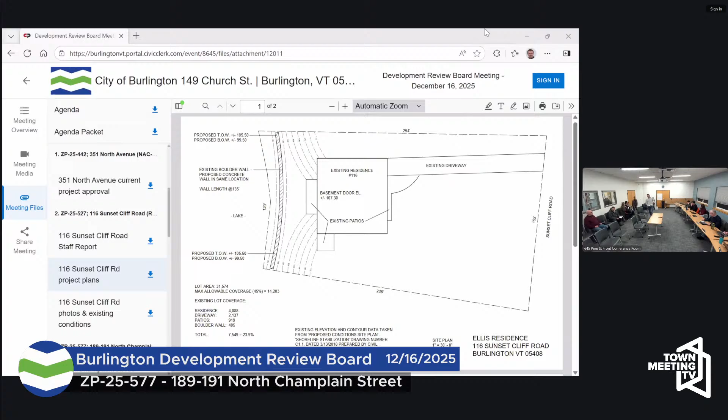We will move on to the next item then, which is ZP-25-577 - 189-191 North Champlain. So quick. Hello.

Thank you, if you want to give us a bit of an overview of the project, the materials submitted were... oh yeah, sorry. And then is there anyone that wants to speak on this item, or anyone else in the room? Just swearing everyone at once. Okay, anyone who wants to speak on this item, if you would raise your right hand and swear that the testimony you give tonight is true and correct under pains and penalty of perjury. Yes.

Hello, Michael Alvanos from Tram, the owner of the property. This property is up for essentially a pretty substantial rehabilitation. I don't know exactly when, but there was a fire on this property, maybe March 2024. It caused significant damage to the upper portion of the building, specifically towards the front, top, and other portions. But the real issue is the fire department brought their equipment in, sprayed water everywhere, and the project was left vacant for a pretty healthy amount of time, and the interior ended up becoming extremely deteriorated throughout the process.

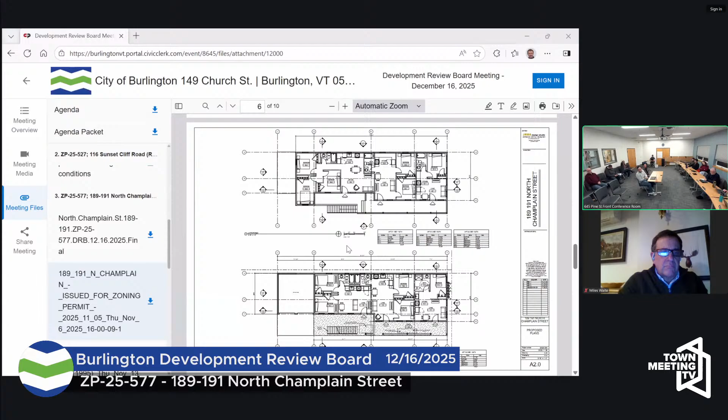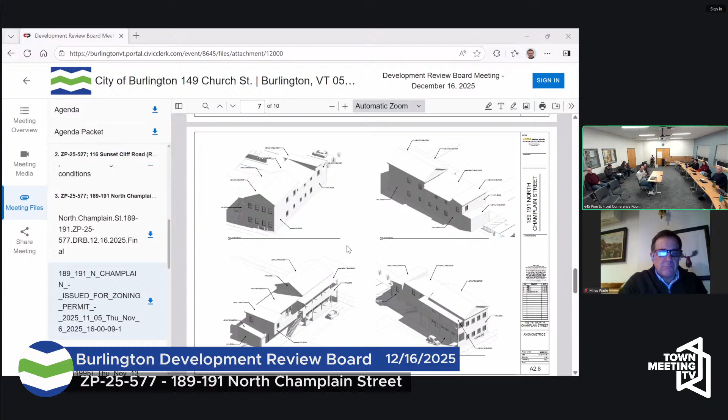These are just some axons showing you - there was a photo page too. Essentially, the exterior of the building is going to get re-sheathed. We're showing wood siding on the building, but there is an option to do a concrete board siding instead. I think we're going to weigh out the costs involved on both of those, to see which one is cost effective for the owner. But new windows, new doors.

The back rear of the property currently has some open garage doors here. I think we're planning on putting some garage doors in. Again, just trying to bring the building back to where it was, hopefully, before it started to go through a substantial amount of neglect.

The staff notes had some information in there, and I got it to Mary later than I wish I did, but there are some architectural details we plan on holding on to throughout the building. There's some corbels and some ornamentation on the front portion of the building that we're planning on keeping. There's some rafter tails at the rear portion of the building that we plan on making sure stay.

What else do we have, Mary? But our intention is, we're not going to - I don't think there's any intention to remove or deteriorate the building's historic qualities anymore. It has been neglected, but we're trying to reinforce those as best we can. I think we're just here to give you guys an idea of what's going on, and hopefully it's a pretty simple process. We'll see.

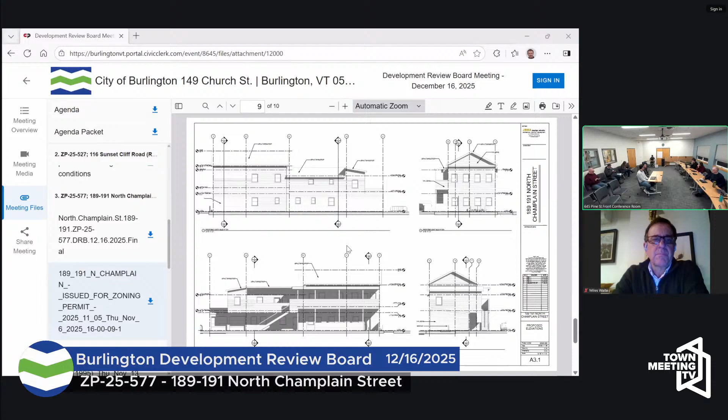Any other questions from the board? I know you all want to speak on this item as well. Yeah, that'd be great. It would be helpful if you can go there for audio purposes and just state your name and where you live.

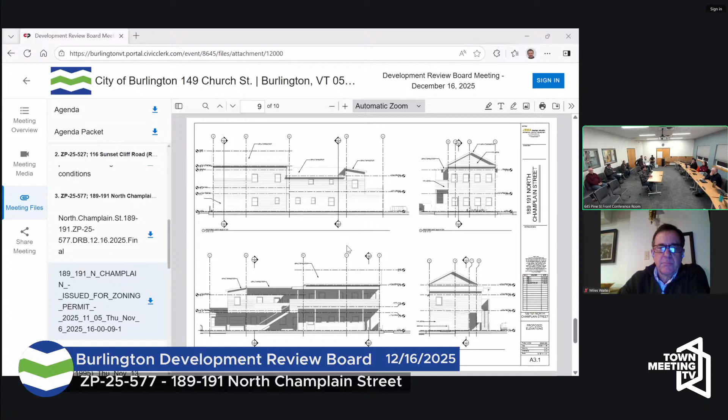Jonathan Rowe, I live at 193 North Champlain with my partner Nora, so we're to the north. Reading the packet yesterday, it was said that the house is on the property line in one portion, and then it said close to the property line. If you look down our driveway, the house is on two different planes - the more easterly part of it juts out a little more.

Whose responsibility is it for determining if it's on the property line, if it's close, or if any part of it is over? If the building is on the property line and the soffit hangs over with no gutter over the plane of our property line, are we responsible for what comes off the roof? Is there any kind of ordinance for putting gutters on? Is this the right place to even ask these questions? Understandable question. I think the basics are that we don't deal with any property line disputes.

The best that we have is the site plans in front of us and how they're marked. So I guess where it says it's on the line, and then it's close to, so it's worded differently. My question would be, say it is on the property line, the plane of the siding, roof overhang X amount, right?

We're more worried about parking under it, and we're at the point now where we can't even open our car doors because of the snow off the roof, because it's so tight. Just in general, obviously we bought the house, we knew what we were getting into. Definitely weren't aware that it was going to be renovated after being vacant for 2 years.

Sorry, late breaking hand raising on that one. So we're reopening the public hearing. Sharon, we're here to hear you on this item. Sorry, I raised my hand late because I didn't think this was going to come up.

I heard the applicant make a statement regarding the affordable unit, and I'm certainly hoping that I understand his position, or the architect's position, but I really feel that we need affordable units, and this meets the criteria. It is more than 5 units, and I feel that 1 unit that is affordable is something that we should support, and I certainly hope that he will understand the value and the need for this in our housing market. So I just wanted to speak before the DRB in support of maintaining what the ordinance allows and have the creation of 1 affordable unit in this reconstruction.

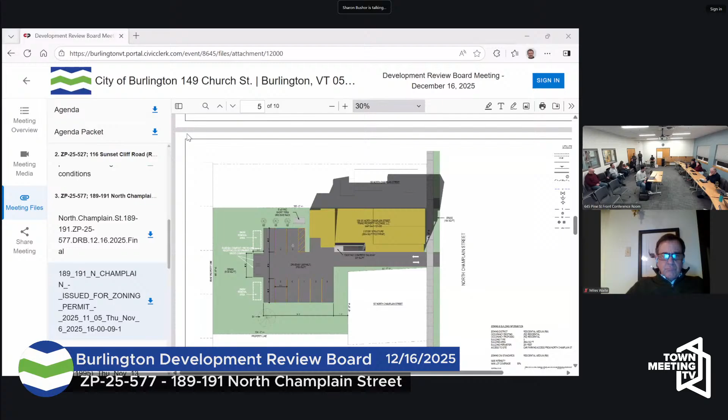Thank you. Thank you, Sharon. Anything you want to do? Okay, thank you very much. With that, we'll close the public hearing. Thank you.

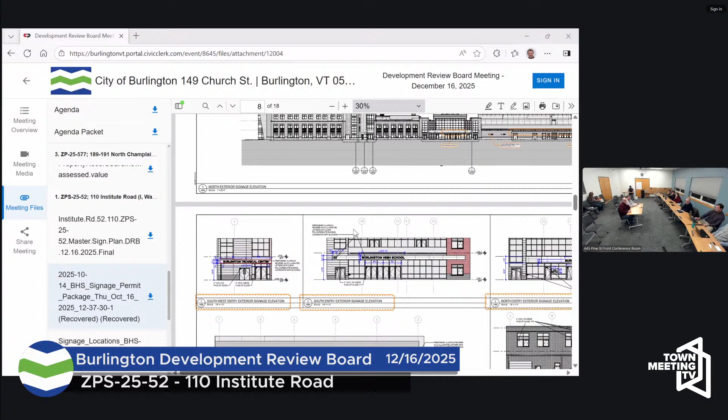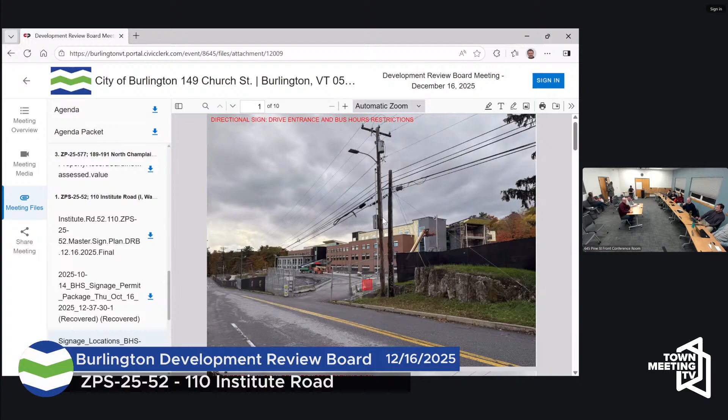Are we able to go down, or actually can we, there's a sign locations PDF there. I think that might be the one that's a little bit more useful to look at for this. Oh, I apologize, there's another file that actually shows the directional signs. This does show the locations for them, but there's another one, yes, that proposed site signs plan.

So within the site, because we're bringing people to multiple locations, depending on which access they're looking for, there are directional signs that we have designed that essentially assemble a set of directional signs into one location. So at the entry to the pull-off drive along Institute Road is the largest one, with arrows that can direct you to whether you're going to the Burlington High School, whether you're going to the Burlington Tech Center, whether you're headed around to the BHS Community Gym.

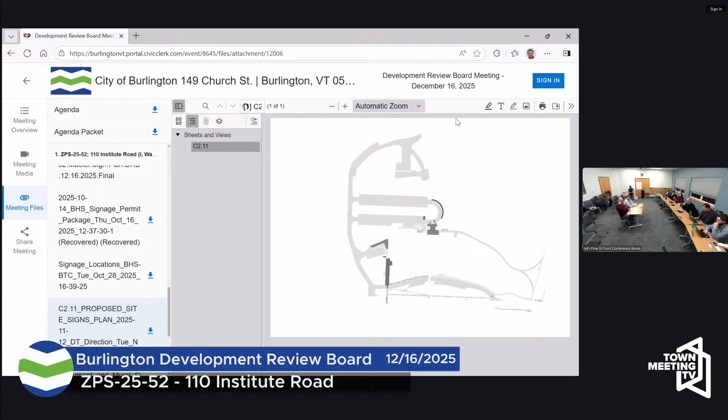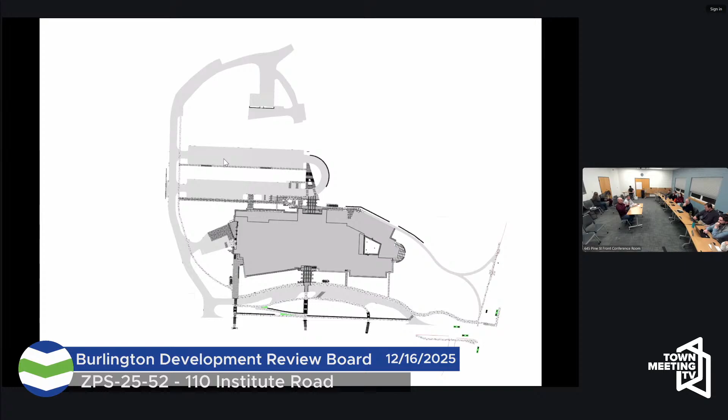Additional required notifications, like that it's only a bus only lane during certain hours of the day, and the no beach parking sign requirement. Our intent with that signage approach was to avoid needing to put all of that information on discrete separate signs all in a cluster right at the end of the road.

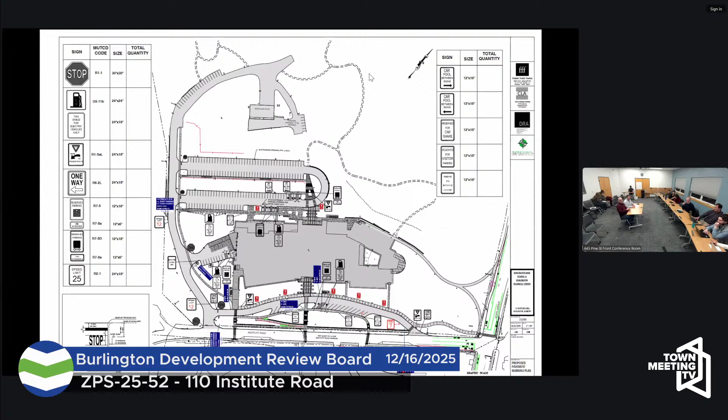So, yeah, there is a larger sample in the packet as well, but you can see kind of where they are located there. At multiple locations, there's different quantities of those signs. Do you remember where it is in the packet? Can we see the list? There's a lot going on the site. It's a large site.

So a different PDF or a single? No, it's a different PDF. If you go back either to the first, it is in the signage packet, the original, or the master sign plan file.

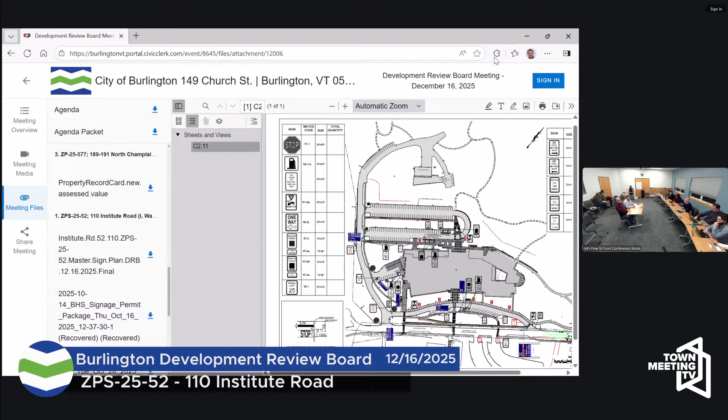Yeah, so that first. I have it on page 9, Scott, of the signage permit package. Thank you, Mary.

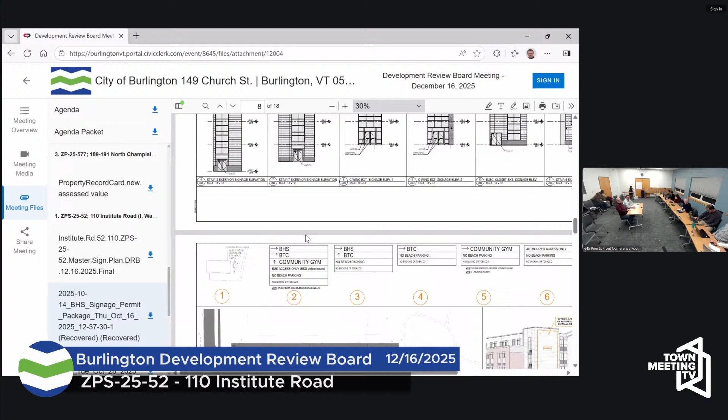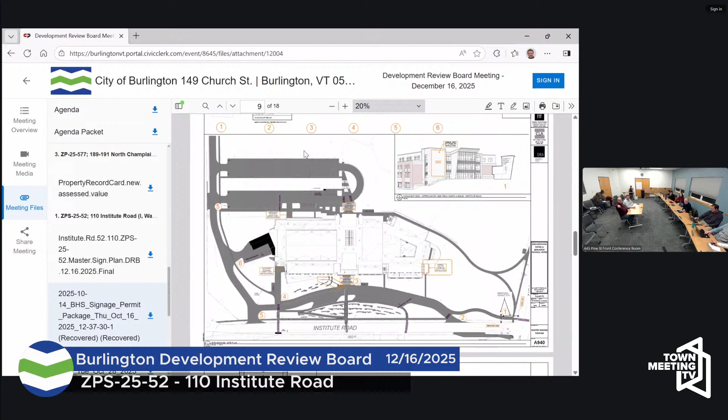So at the top of this page, if you scroll up just a little bit, you can kind of see, or actually go down to the next page. Sorry, it is on the next page. There we go. So essentially what we have is two posts holding a series of stacked signs.

That is the interpretation we're requesting. The decision, the point I guess essentially for this board, is accepting that that is a series of directional signs. Because our alternative is to provide all that information in 6 discrete signs on the home posts, and area, which would be allowed.

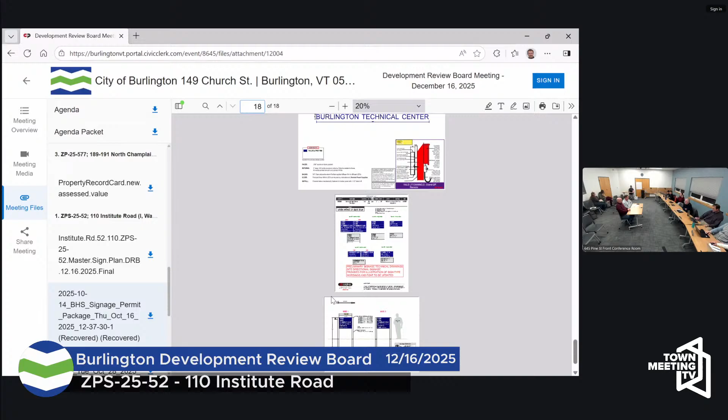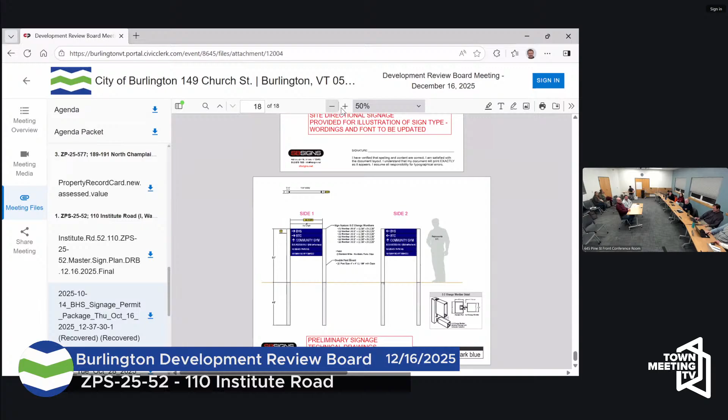Well, it needs to be a certain size, that's a requirement. It needs to be visible to people, and the purpose of this is primarily for people driving onto the site, they need to be able to quickly tell where to go to access the different aspects of the site.

And you also said you wanted to avoid having a sign for each of these pieces of information all next to each other, right? So the way these are assembled, it is actually discrete aluminum planks with that information that can be added, changed, or removed within each of these frames.

So it is 2 aluminum posts, square posts, and pre-finished aluminum planks. So it's both modular and looks modular. Yes.

So rather than trying to reinvent the wheel, have you decided or looked into what works on other campuses where there's individual signs or just a directional like this?

When you say individual signs, well, rather than having individual directional signs, a board that directs people, this is where you're gonna go for this, this is where you're gonna go for that. This is not the first time we're trying to decide this from other institutions or campuses.

Right, I mean, this is a standard, regular signage, something that works better than something else, that's what matters. Yeah, I mean, that's why we proposed this. This is a standard signage product that for this purpose offers the flexibility.

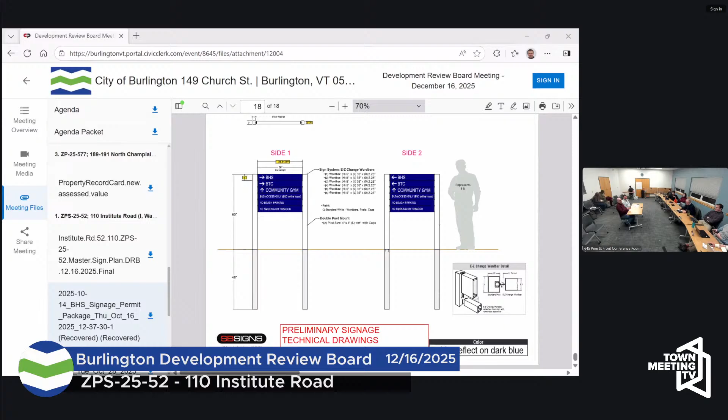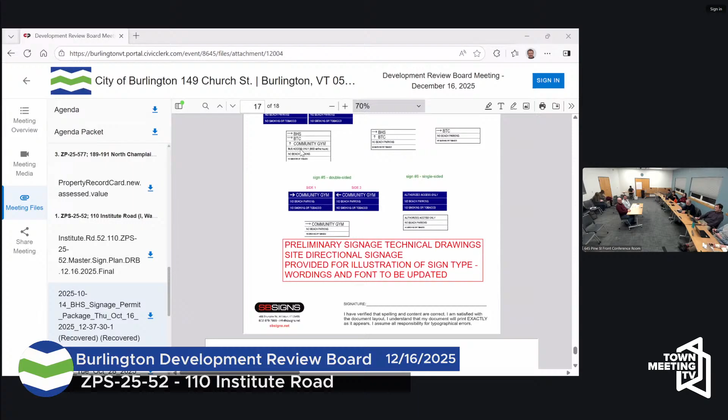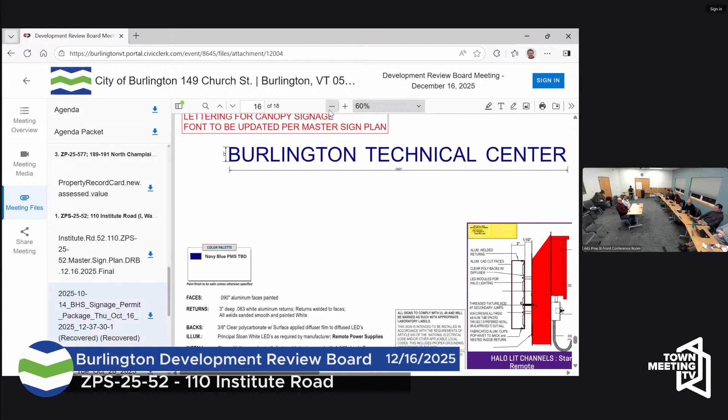Okay, so I think the next one is really two signs in one, essentially the monument sign, which incorporates an electronic display. If you could go back to the sign plan. I don't believe it's in this PDF. Yes, keep going up, keep going up. It is. I think the monument sign street view gives a good illustration of what you're proposing. That is a separate one. Yes.

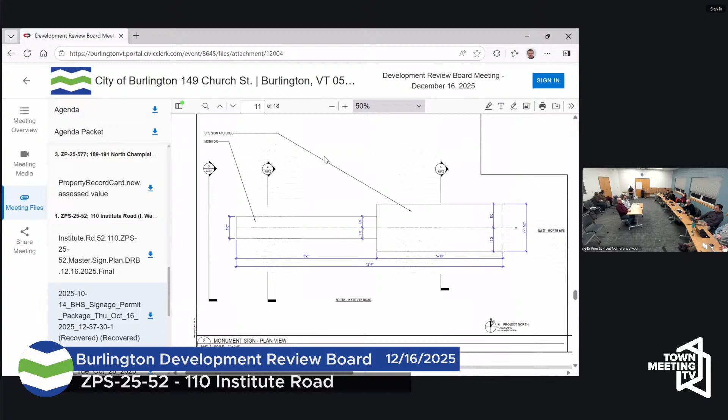But this does have the elevation which identifies... yeah, right here. So there's two dimensional criteria we're looking at here. One is pretty straightforward, I believe. The area for a monument sign is allocated as 60 square feet. When we submitted this, we included both the electronic display, the text, and the logo as all part of that, ending up at 72 square feet with the current design, which is within the 20% allowable variation to the 60 square feet that the ordinance allows you to consider.

We also identified that the dimensional criteria of the actual lettering of the Burlington High School and Technical Center portion of the sign is above. So basically, the location of this sign is higher than the ordinance describes. It sets a limit of 6 feet, and we're at 9 foot 4 inches to the top of the letters. So those are the two dimensional criteria on the monument sign.

Specifically, again, based on the scale of the site and the property, we felt this was appropriate, and Mary has made good reference. I would like, if we could, there's a file a little farther down called Site View, I believe. Street view, monument and mural. Yeah, Street View overlay, was where now.

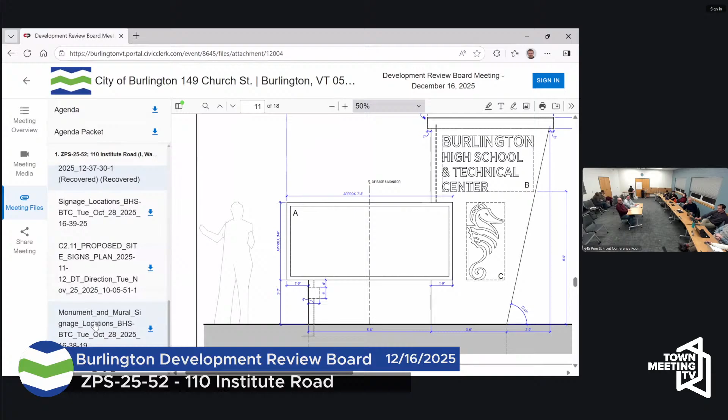We're basically looking at reusing power and data access to the current monument sign for this. And so the staff report outlines that alternative compliance may be considered for location — they are proposing an installation site that is not definitive to the ordinance, but it is allowable for consideration under alternative compliance for the sign. That's on page 10 of the staff report, where we have the pretty pictures.

And then the last piece of interpretation relates entirely to the programming of the electronic sign. That really came out of us looking at the district's preferred way to operate such a sign. Essentially, the ordinance provides a maximum illumination level, that the messages cannot change any more frequently than once every 2 minutes, and that all that can be used on the changeable electronic display is 3 lines of text, one single color on one single background color.

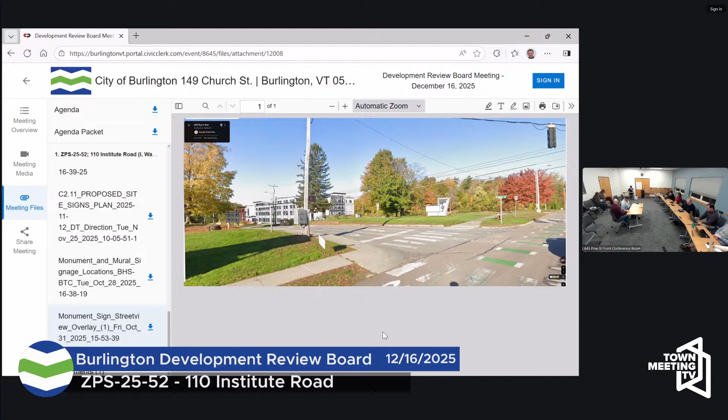Thank you. Did we now have our applicant over? No calls, no texts. 116 Sunset Cliff? Push back to January, we need to make a motion on that. Yeah, it's not a public hearing, so we can just follow up. Right, about the...

Recording stopped. Miles, Marina, you all have been quiet, so I will make sure to make space for you, we haven't forgotten you're there. Okay, so we are with 351 North Avenue, the TDM. I'm sympathetic to the...